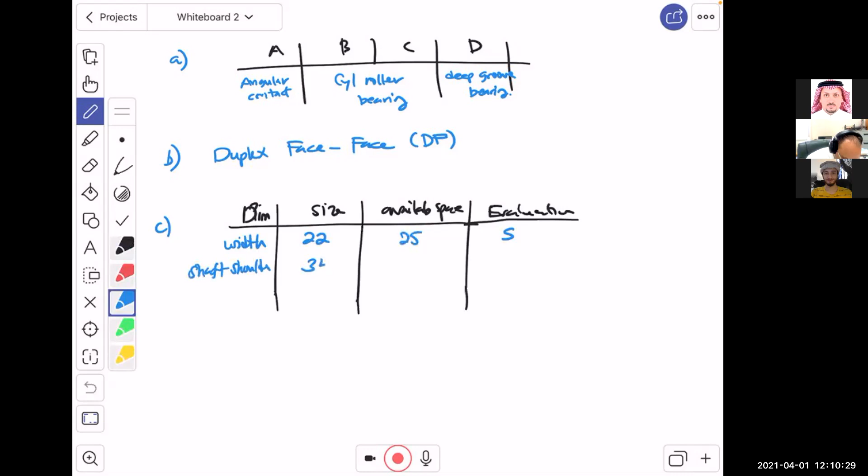We have a minimum of 25, so it is satisfactory. Then the other one is the shaft shoulder. The shaft shoulder is size 34. We only have 30, so this is not satisfactory. The housing shoulder requires 49. We have 45, and for the shoulder, if it is smaller, it means there is enough space for it to sit. So this is satisfactory. And then we have the outside diameter, which is 52, and we have 52, so this is also satisfactory.

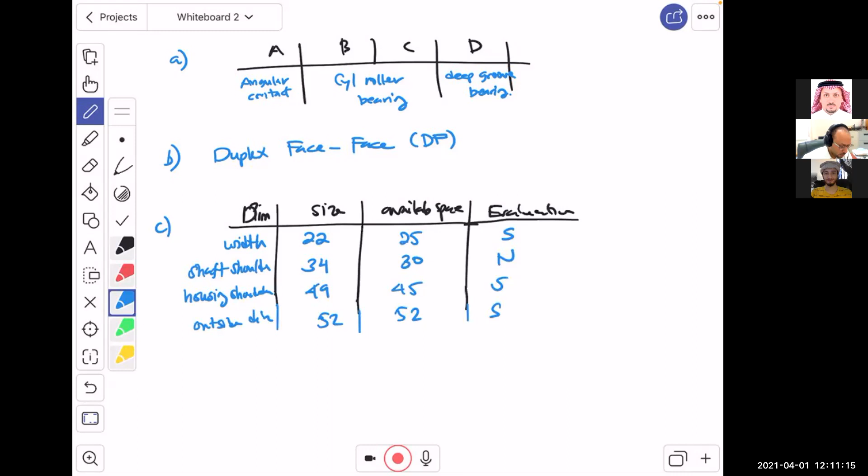Now the next one, which was a little bit challenging to most of you and a little bit surprising to me, is finding reactions and forces. Now, this is the dimension X. Of course, we're talking about the worm. This is X, this is Y. And this plane is X, this is Z.

Of course, ya shabab, although these axes were given to you, still many students got confused, and they start thinking that there is a force in the X direction while there is a force in the Z direction, and so on. So this is RBY. This one is RAY.

Of course, we have an induced load, FIA, because these are tapered bearings, and we'll have here FIB. What else do we have? We have an axial load acting on the worm. We have a radial load acting on the worm, and because of the shift of the force to the gear location where they both meet, we have W worm axial multiplied by D worm over 2 as a moment.

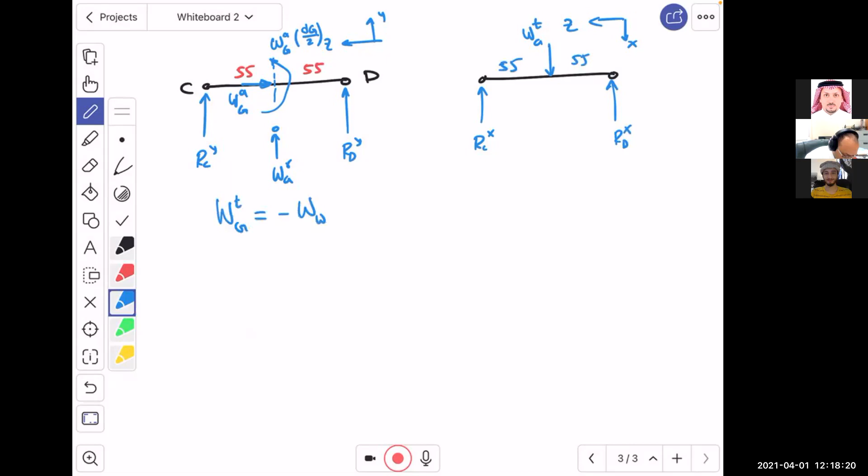So knowing, ya shabab, that the transmitted load on the gear is equal to minus the axial load in the worm, the radial load on the gear is equal to minus the radial load on the worm, and the axial load on the gear is equal to minus the tangential load on the worm.

And then by summing up the moment about X, which is equal to 0, you will get RDY, which is equal to minus 219.1 Newton. You will get RCY, which is equal to minus 139.5 Newton. You sum up the moment about Y, you say this is equal to 0, and then what do you get? You get RDX, which is equal to 565 Newton, RCX, which is equal to 565 Newton.

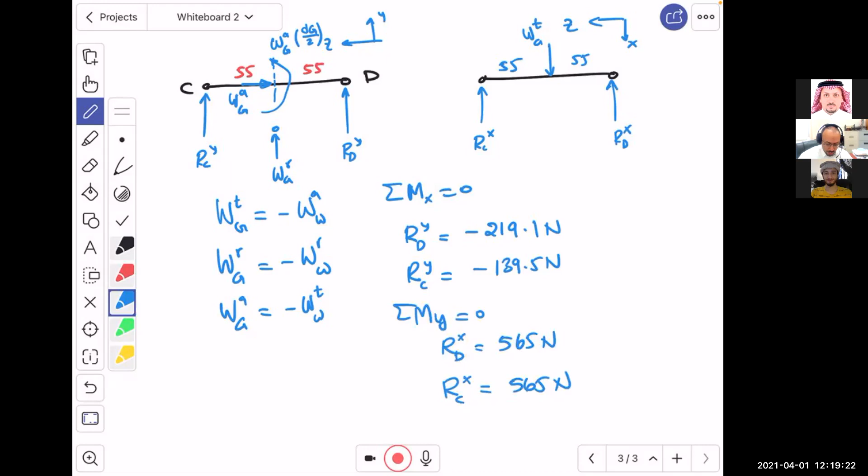Now, what is important is if we construct the table, let me just bring the table here and try to draw it for you. So we have the bearing, and then we have the induced thrust, we have the radial load, and we have the thrust load. Okay, so we have bearing A, B, C, and D. Okay, so let me put those values for you. For A, we have an induced thrust of 94.2. Of course, everything is in Newton.

Doctor, in this thrust section, they said resultant. Did they mean the resultant, the equivalent? You mean? No. This one is just how much. Do you have an induced and an applied thrust? Kind of, they added together or not? That's it. Okay. All right.

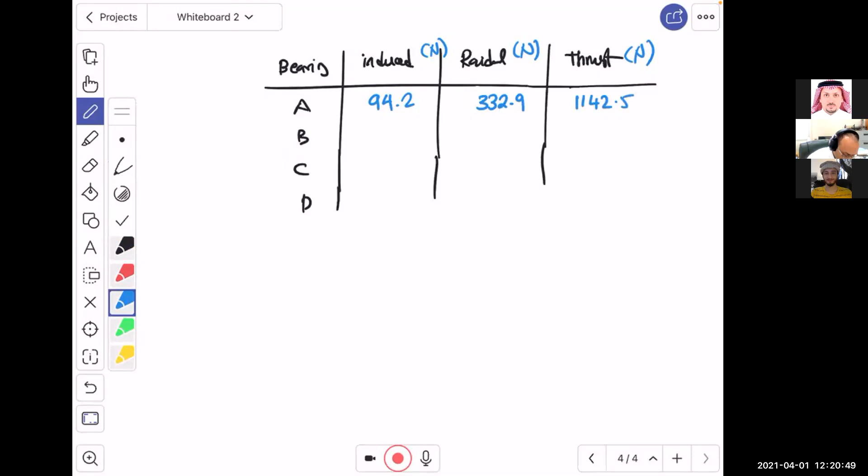So this is the radial 300. Oh, sorry. Let me just make it look nice. 332.9, and this is 1142.5. Then this is 12.5. This is 44.1. There is no thrust over here. And then we have these two guys, no induced, okay? And what do we have here? We have 582, 606, and then 73. The 73, of course, for D, because D is subjected to a thrust load, is taking the thrust, okay? While C is not.

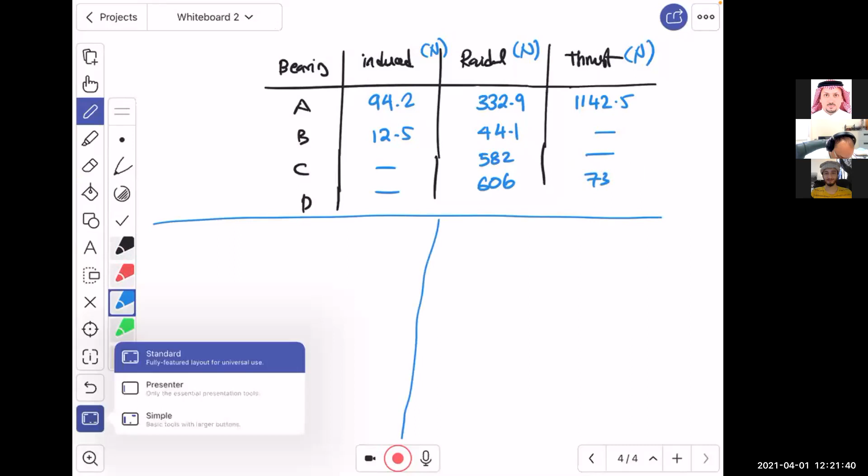Now, we go to the next one, which is the reliability, okay? Now, for the reliability, what you need to understand is that we have two. Maybe this is easier. Okay, all right. So we have, for the input shaft, we have for the output. So for the input, we have N equals 1800 RPM. We have L, which is equal to 30 kilo hours. This is based on the recommendation of 8 hours a day.

And then you calculate L, which is equal to 30,000 multiplied by 60 multiplied by 1,800. And then what do you get? You get 3.24 multiplied by 10 to the power 9. So what is XD? XD is equal to 3.24 multiplied by 10 to the power 9 divided by 90 multiplied by 10 to the power 6, which is equal to 36.

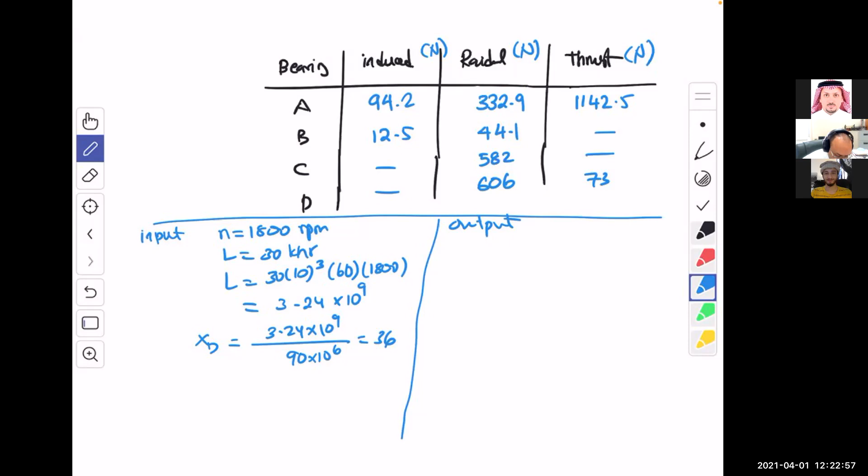For the output, we have N equals 30 RPM and L equals 30 kilo hours. So L is equal to 30 multiplied by 10 to the power 3 multiplied by 60 multiplied by 30 again, which is the RPM. What do you get? 54 multiplied by 10 to the power 6. So what is XD? XD is 54 multiplied by 10 to the power 6 divided by 10 to the power 6. And this is going to get you 54.

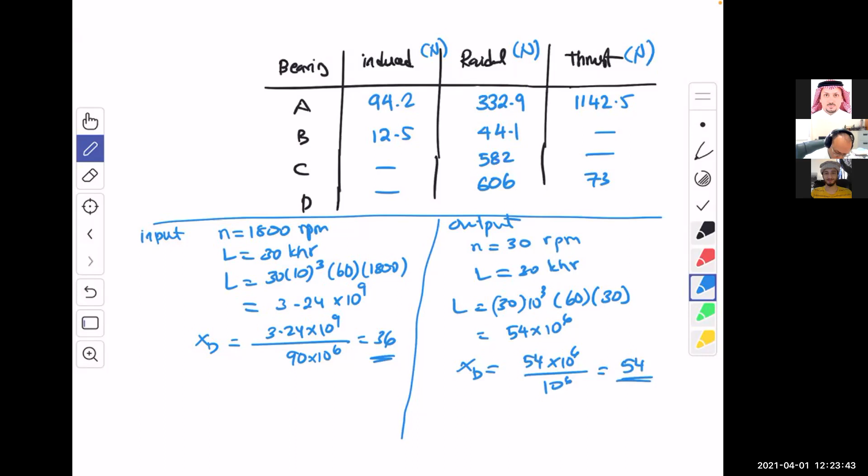That 36 and 54 turned out to be very difficult somehow. I haven't seen it a lot. I haven't. Now, let's move on. Where is that one? Yeah, okay. So we got these values.

Now the question is, what is the equivalent load now? For FA, as it is going to take the thrust, it is 0.4 multiplied by the radial load, which we tabulated before, plus 1.66 multiplied by the resultant thrust, which is the thrust coming from what, ya shabab? I will write it down here. This 1,142.5 is coming from FIB, the thrust going from B to A, plus the thrust load, which was given to you, right? So this is going to give you 2,029.7 Newton. Okay, now FE for B, B is not going to take any thrust, so the equivalent is coming from the radial load, so it is 44.1 Newton.

Now, what is FEC? FEC, as we told you, is only going to take a radial load. So what is going to be applied there is only the resultant radial load. Yeah, where from the Z and X, you square them under the square root. That's the resultant load. So this is the equivalent.

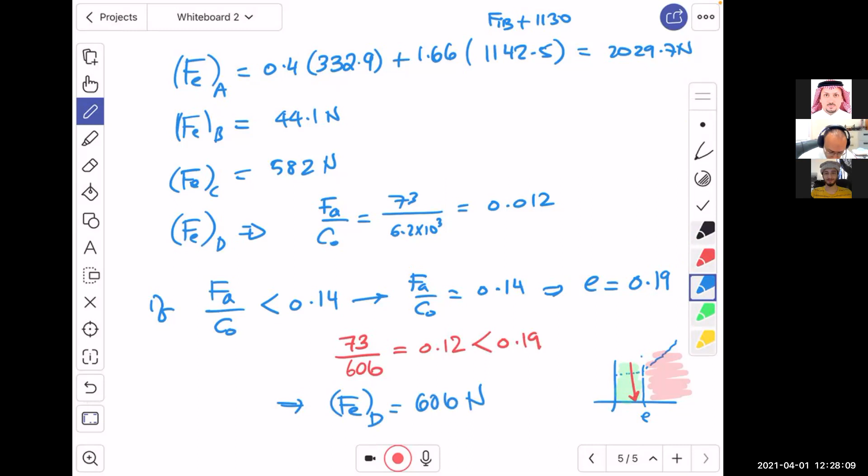Once we know all the radial, the desired load, once we know the xD, then we know that for the tapered bearings, we have R equal to 1 minus xD, which we calculated, divided by 4.48, multiplied by C10 divided by aF FD to the power 10/3, and then this one to the power 3/2. And of course, we know C10, we know aF, we know FD, and we know xD.

Now, what about the angular, the roller bearing? Not the roller, the ball bearing. Then R is equal to 1 minus xD multiplied by aF FD divided by C10 to the power a, divided by theta minus x0. Here x0 is 0, and that's it.

So if you do this, you will find that RA is equal to 0.9927. RB is nearly 1, 0.999 something. RC is going to be 1, and RD is going to be 1 as well. If you multiply them all, you will get R total, which is 0.992, which is greater than 0.97. So we are all set.

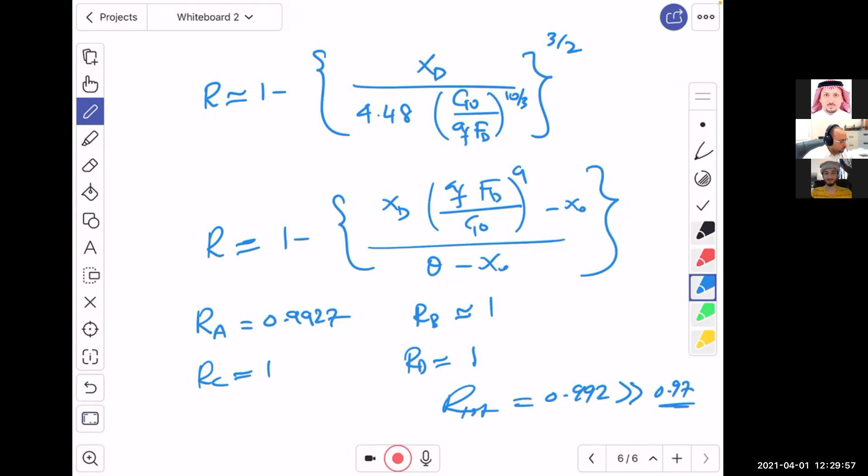Now, let me move on quickly to the calculation for the second problem also. For the second problem, I told you in the lecture that the most challenging part is probably one number, which is rm, and I'm going to explain it to you here. So basically, just to save time, we quickly open up. We were asked in the beginning to find the forces acting on the pinion, then on the gear, and then we want to determine the reactions.

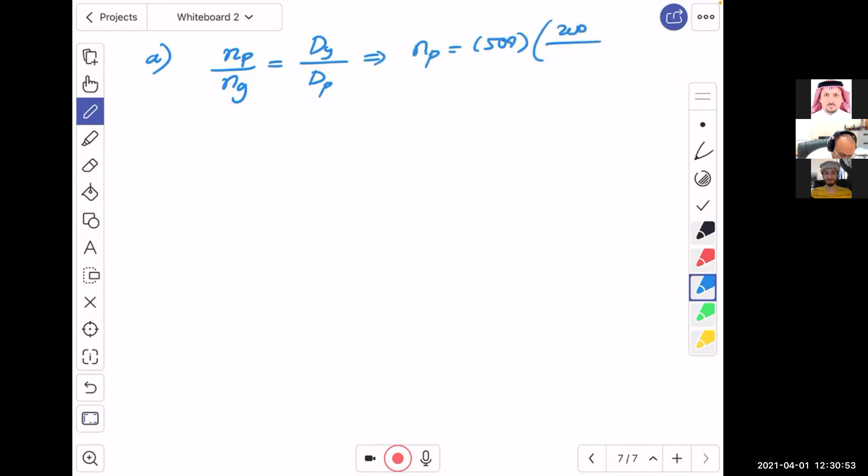So we start with A, finding the forces on the pinion. We know that the RPM for the pinion divided by the RPM for the gear is equal to the diameter of the gear divided by the diameter of the pinion, which means that nP is equal to 500 multiplied by 200 divided by 100, which is going to give you 1000 RPM. Now, tan gamma for the pinion is dP over dG, which is 100 divided by 200. So if you take the tan inverse, you will get gamma as 26.57 degrees.

Okay, now this is the challenge, and I explained this before to you. I told you that if you look at the pinion and the gear, they are engaged or mating in there, then what will happen is this. We told you that we assume that the whole force action is happening right in the middle. How do you calculate this? It's a question, right? So how do we calculate it?

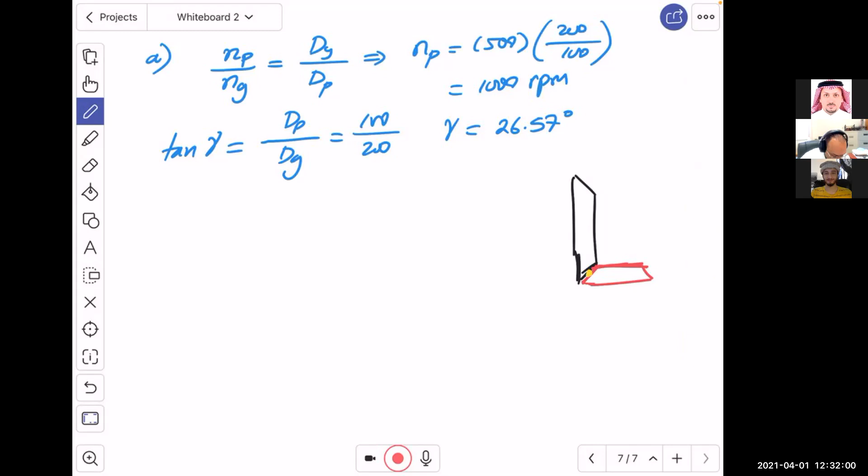Well, we go and use triangles, right? And if I draw a triangle right here for you, listen, this may not look straightforward. But I'm telling you, students did it, not a lot, but it's not impossible. Whoever put his mind on it was able to do it. So in here, that's the triangle. This is the diameter of the gear over 2. And then we have here the face width b. And then we have here the diameter of the pinion over 2.

And right in the middle over here, I'm going to write RM. That RM is the mean radius. Okay? So what is that mean radius? RM is equal to D for the pinion over 2 minus B sine gamma over 2. It can be shown that this is it. I have seen some students find it with some similar relation, but it doesn't matter. What is this gonna give you? It is gonna give you 45.53 millimeter.

Now, why is this very important? Because when you find this, basically, the pitch line velocity: 2 pi is going to be multiplied by 45.53 divided by 1,000, just to convert it into meter, multiplied by the RPM divided by 60, which is going to give you 4.77 meter per second. Now, when you know the velocity, all you need to do is to say WT, the transmitted load, is equal to 5,000 divided by 4.77. This is going to give you 1,049 Newton.

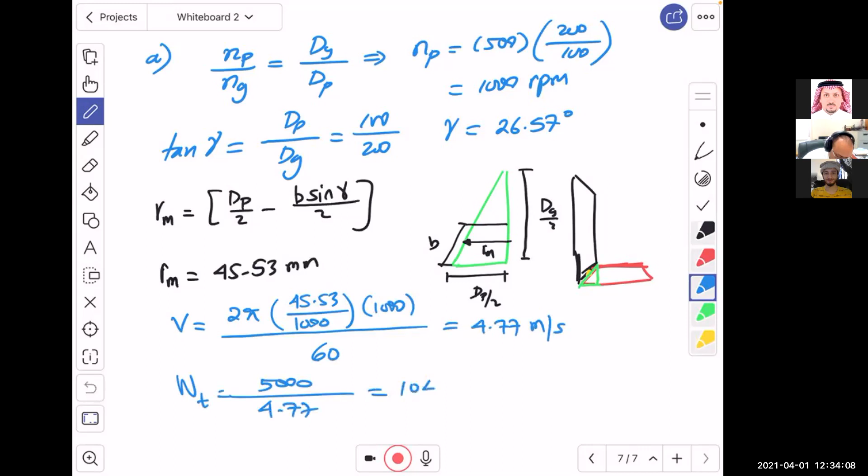When we know the transmitted load, we can calculate WR, which is WT tan phi cosine gamma, which is going to give you 341.48 Newton. Then we have WA, which is equal to WT multiplied by tan phi sine gamma, and this is going to be 170.77 Newton. What is happening on the other gear? Capital gamma equals 90 minus gamma, which is 63.43 degrees.

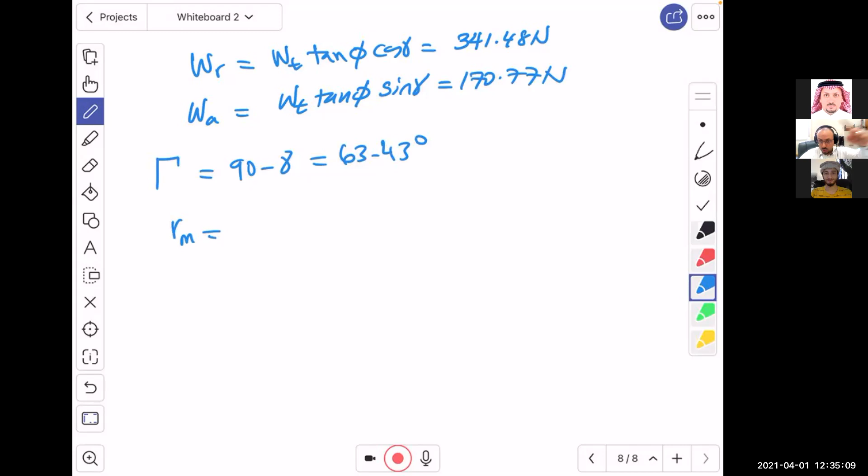Again, you can show RM. This is just to show you the calculation, but by knowing what's happening on the pinion, you can just reverse the angle and swap the forces to know what's happening on the gear. But just to show you for learning, the diameter of the gear over 2 minus B sine capital gamma divided by 2 is going to give you 91.06 millimeter.

Now that's the problem. Some students knew that, for example, the radial load on the gear is the same as the axial load on the pinion. They did it right. But the problem is they did not calculate RM for the gear. And I will show you what are the consequences of this. So by knowing this, what should you do right now? If you calculate WT, you'll get it the same. It will not change. It's the transmitted load.

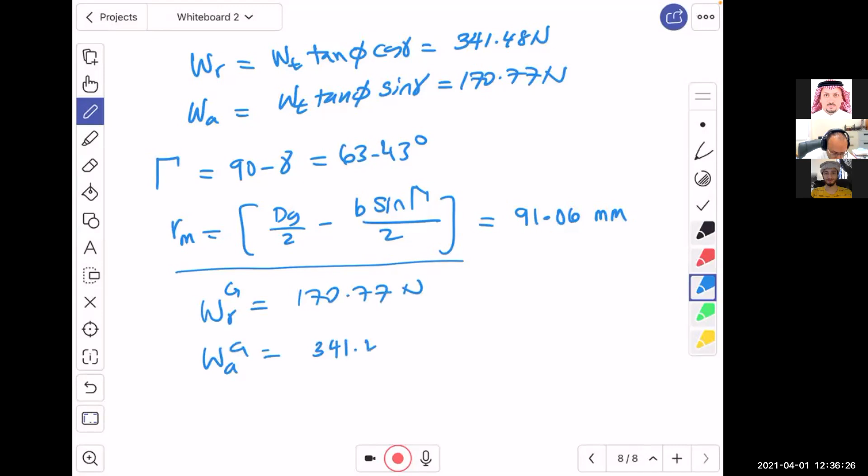But you will have WR on the gear, so I will put a gear here, which is going to be 170.77 Newton. And you will have WA on the gear, which is equal to 341.48 Newton. Now, this is the most significant diagram that I'm gonna draw over here. The free body diagram, okay?

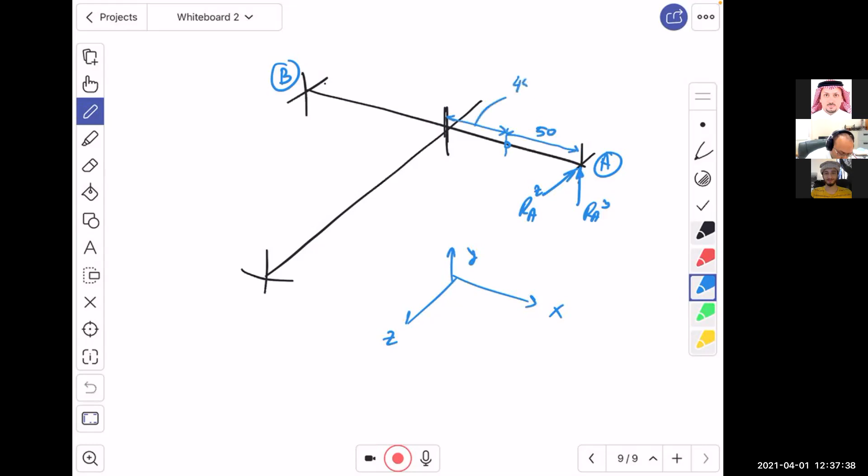Now, what do we have here? Well, we have A right there. We have B right there. And based on the solution I have, RAY is here. RAZ is here. It doesn't matter if you put it in the other direction. By the way, a very important piece of information is this. Let me draw it with the same alignment. This is X, this is Z, and this is Y. Point O is here. This distance is actually 50. But this one is 45.53, which means that the remainder of the entire length is 54.47.

Now, what do we have here? We have RBZ, we have RBY, and, oh, sorry, here RBX. What is in there? Here we have the axial, of course. We have the radial going in the radius direction, WR, and then the tangential has to be perpendicular to the plane of both, whether up or down, which is WT. What is this distance, ya shabab? This one is 91.06 millimeter.

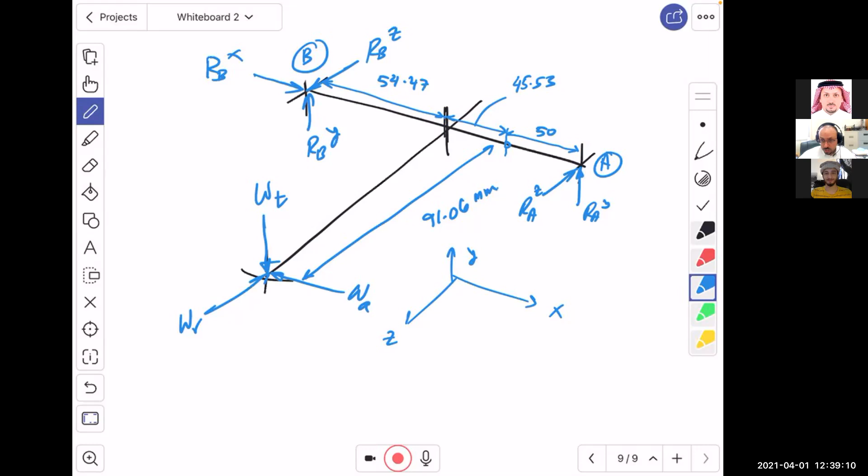Now, these dimensions cause problems. That's why, if you made a mistake with RM and did not calculate it, for each RM you will lose 2 marks. But I promise that you should not lose more if everything is okay within the calculation. If you feel maybe I missed it, come and talk to me. So what will happen now? We will go for the XY plane.

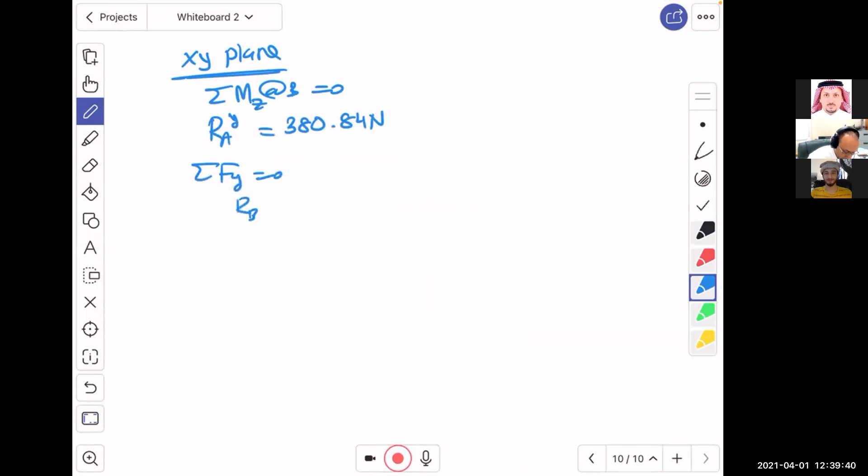And then we will sum up the moment about Z at B equals 0. And we're going to get RAY, which is equal to 380.84 Newton. We will get from the summation of forces along Y, RBY, which is equal to 667.7 Newton. And then from the XZ plane, we will sum up the moment about Y at B, say that this is equal to 0, and we'll get RAZ equal to 145.25 Newton.

We sum up the forces about Z equals 0, and then we'll get RBZ equals 315.95 Newton. And then if we sum up the forces, of course, about X, we have only one force, which is the reaction BX, which is equal to WA, which is 341.4 Newton.

That's it. Now, we go to the next part, which is the interference. For the interference, you have to calculate M, which is NB divided by NA. This is 25 divided by 18, which is 1.389. Then you calculate PT, which is equal to pi by MT. This is equal to pi by 3, which is 9.42 millimeter.

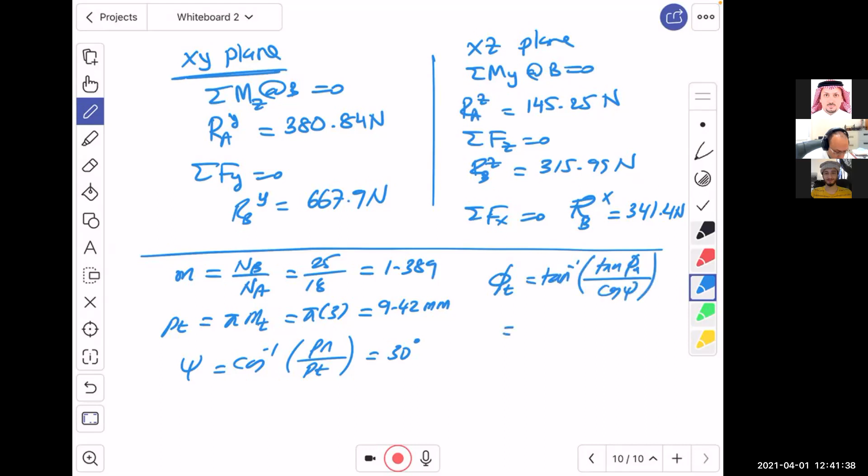So psi is equal to cosine inverse of Pn over Pt, which is going to give you 30 degrees. How about phi t? Phi t is equal to the tan inverse of tan phi n divided by cosine psi. And this should give you 22.8 degrees.

If you have all of this, you would go and find NP, which is equal to 2K cosine psi divided by 1 plus 2m multiplied by sine square phi t. And then this is multiplied by m plus the square root of m squared plus 1 plus 2m, multiplied by sine square phi t, and that's it.

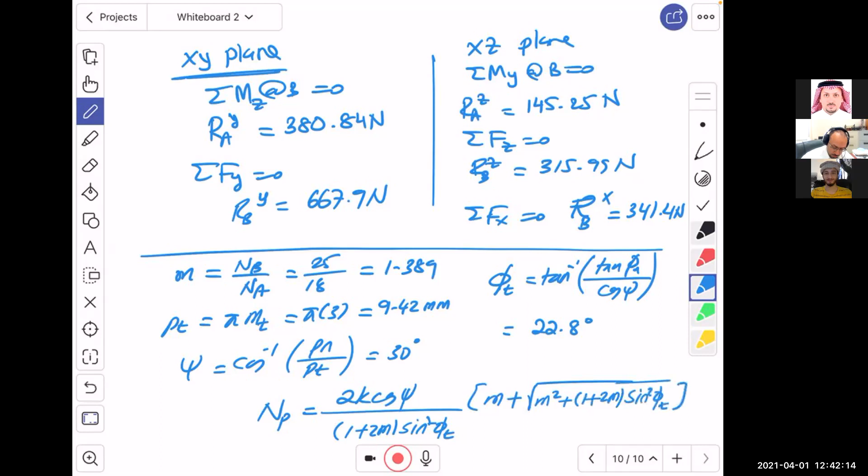If you do this, you just substitute the numbers. Make sure you punch the numbers right, because when you do it by the calculator, sometimes you make mistakes. You get NP, which is equal to 9 teeth. So since you have, for the pinion, 18 teeth, then there is no interference. Okay.

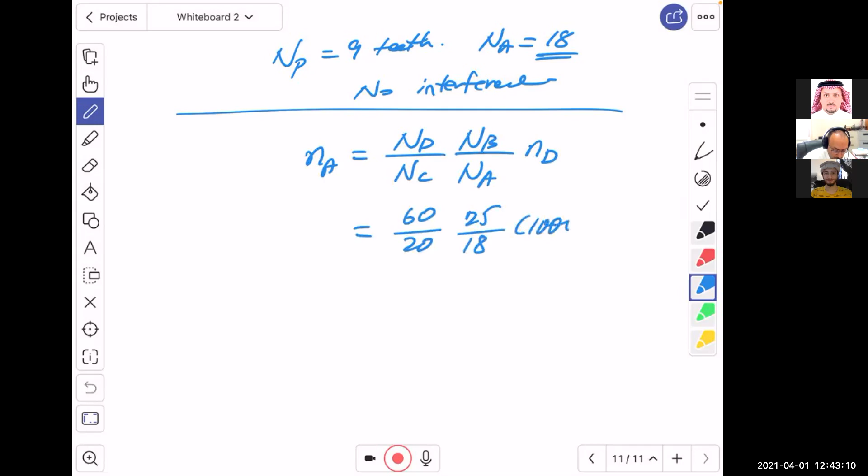The next one is for calculating the RPM. Now, for the RPM, NA is equal to ND divided by NC, then NB divided by NA, then multiplied by nD. So, what is this? 60 number of teeth divided by 20, 25 divided by 18, then multiplied by 1,000. When we multiply by 1,000, what do we get? We get nA equals 4166.67 RPM. And if you track the rotation, you will see that it's counterclockwise, or in the positive Z direction.

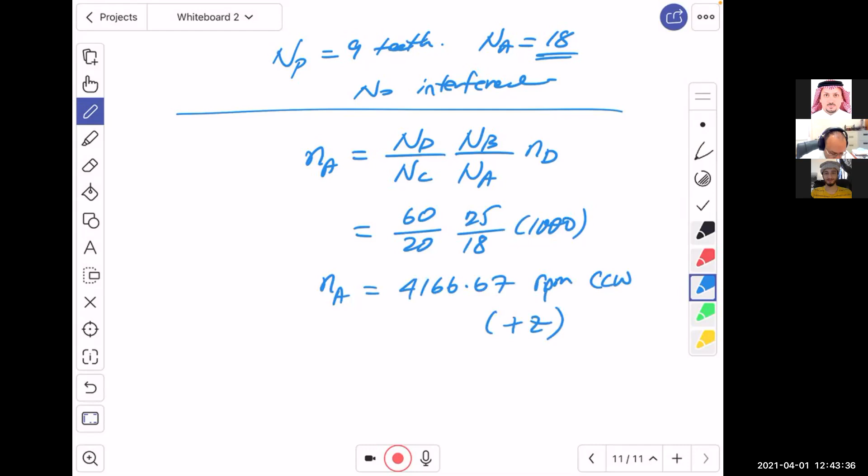The last part is what is the type of the arrangement, a gear called compound reverted gear. The next question is about adjusting, since we want to make it in line. We want to adjust the number of teeth to sustain a ratio of 4:1. Now, not all of you made this solution, but I'm gonna teach you the ideal solution.

The ideal solution is to observe that ND over NC from the previous calculation was 60 over 20, which is 3. And NB divided by NA is equal to 25 over 18, which is 1.38. Now, using these two ratios, you got 4167 approximately compared to 1,000, which means for each one, you get nearly 4.16. So you take that as a guide and you say, you know what?

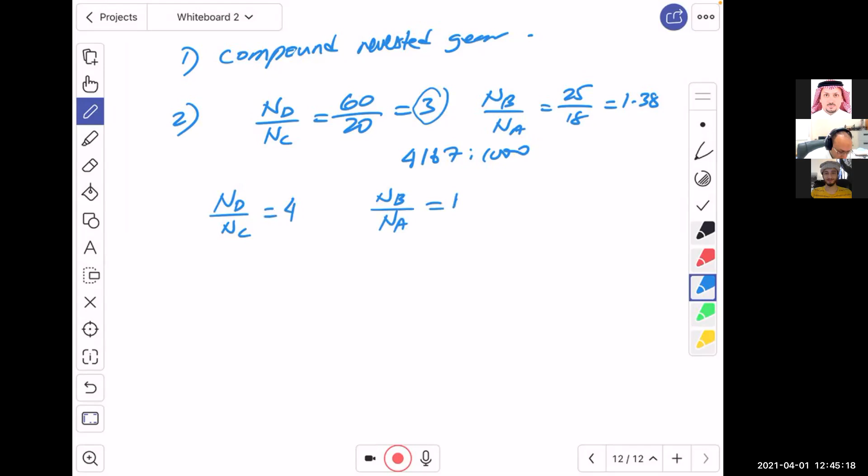I'm gonna start by ND over NC. I'm gonna make it 4. And then I will make NB divided by NA equal to 1. That's what we taught you. So you know that the relation that controls the dimension is ND plus NC is equal to NA plus NB. Now, if you use this relation and substitute them back, you're going to get an NA which is equal to 5/2 NC, which means you need to have NC as a multiple of 2.

So you say, okay, I want NC to be 16. Instead of 20, let's make it 16. And then if I do that, I will get ND, which is equal to 16 by 4, because the ratio we set to be 4. So it's going to be 64. If I use this equation, it will tell me that NA is equal to 40 and NB will have to be 40. Why? Because surprisingly, ya shabab, some of you, so NB has to be 40.

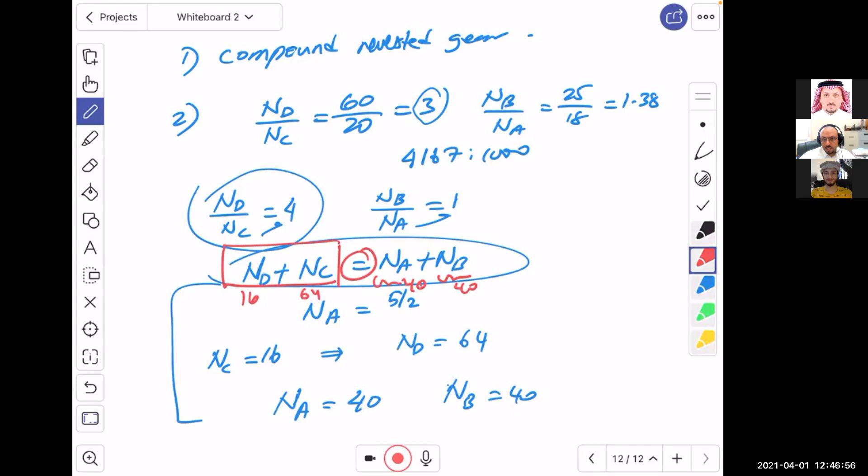Why? Because this side now is 16 and 64, which is 80. If this is 40, then this must be 40 because you have an equation. So some students solve the problem without even noticing that the left-hand side doesn't equal the right-hand side. So what the question is asking you later is, after finding these values, calculate the gear train value, which is E. Of course, you take 64 divided by 16, and then you multiply it by 40 over 40, and what do you get? You get a 4. And that's it.